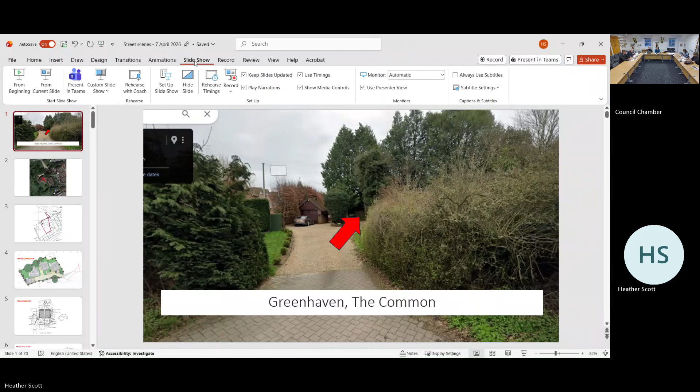Okay, we've rounded up a bit. This application is a resubmission following the refusal of an application for the demolition of the existing and replacement with 3 detached properties. This application now seeks replacement with just 2 properties.

Currently on the site is a dated dormer bungalow which covers a good sized footprint, with the plot's land totalling around 0.15 hectares. It's proposed to demolish this property and develop the plot with 2 detached properties. The area is characterised by properties that are set back from the road with natural screening and grassed areas in front. Properties are well spaced with ample amenity space around.

This application looks to address the previous reasons for refusal by reduction in the number of dwellings, revised siting and a reduction in height, which would ensure a more spacious form of development compatible with its surroundings. The siting and orientation of the dwellings, together with their relatively modest ridge heights, would ensure that the development does not result in an unacceptable loss of light or privacy and does not cause overbearing impact to the neighbouring properties.

The proposal would deliver a safe means of access with provisions made for refuse collection and fire safety. As part of the application, the applicant will enter into an agreement ensuring appropriate mitigation against any adverse impacts on the Chilterns Beechwoods Special Area of Conservation.

The proposal would not result in the loss of trees or landscaping features. New planting would be provided. The ridge height of the proposed dwellings is around 8 metres, which is a reduction from the 11.5 metres in the refused application. The existing property height is around 8.3 metres at the highest point.

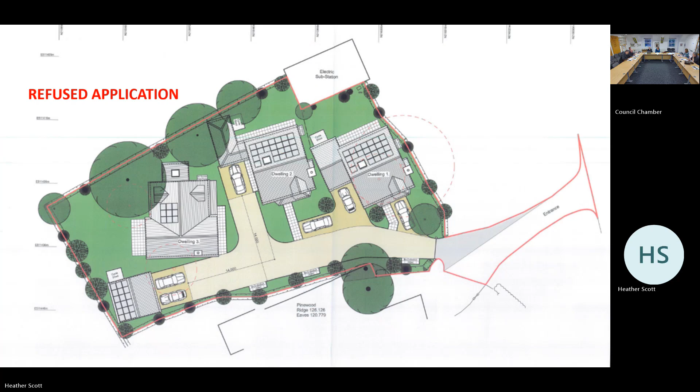So is your point in respect of the bins, the increase in bins, the traffic, and the objection that's been made? And it's just those posts put in that lay-by - stop people pulling up there.

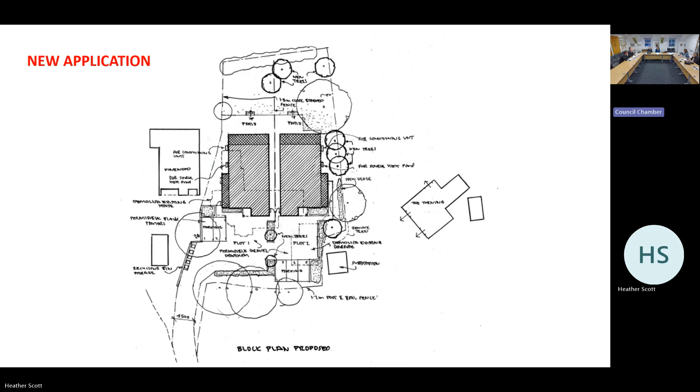I'm not sure there's a lay-by, more like a verge where people get parking. Oh right, I think what they're referring to is actually parking in our car park just on the end. So they park in the car park, and because there is no footpath, they walk along the verge to get to their driveway on the left, and then cross over, because they're coming up from that car park on the corner.

Alistair? There's not really a reason, is there, ultimately - so it's sort of valid, but unfortunately for the parties concerned, it's not a reason to not allow it. They've addressed all the issues - the heights, the number of properties. So I have sympathy, but I think as well, you could have one house with someone who's got maybe 11 or 12 cars.

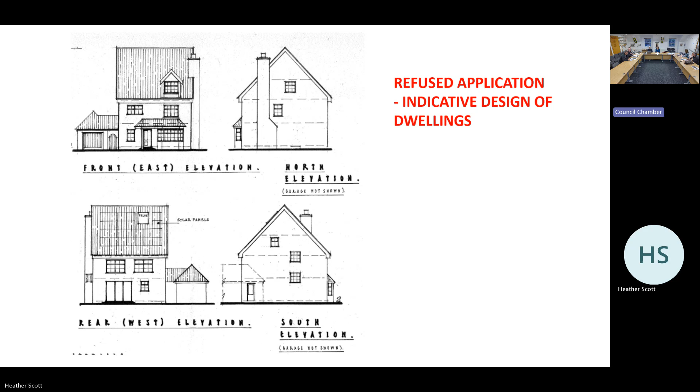Or you could have 2 houses where they've only got 2 cars each, so it doesn't necessarily dictate anything. There's no concerns expressed from the refuse collection department at St Albans, and they are one of the consultees, so.

Is everyone happy with what Heather suggested, which is no objection subject to the previous reasons for refusal request? Also, you think of bin collections on terraced houses, on pavements - it's chaos.

So we're happy with it - it's not ideal, it's not brilliant, but as Alistair said, I have got some sympathy. It's not absolutely - I suspect what will have to happen is there will just be some trimming back of that hedge, bush, just to make a bit of room for people driving onto the ground to get to the driveway.

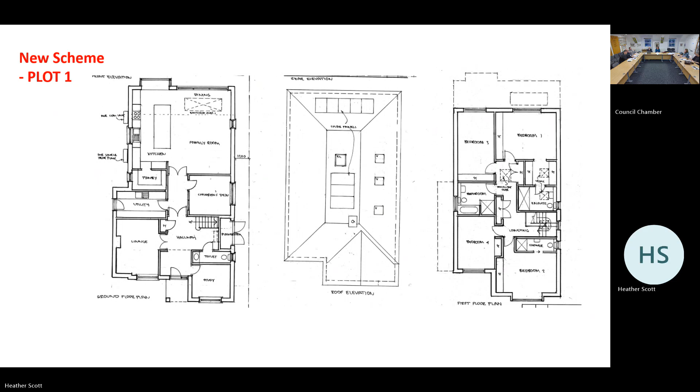That's great, okay, so we're all fine with that one. So now we're going to 5/2026/0339, which is 15 Rothamsted Avenue.

Thank you, Heather. This property has had a number of applications with similar intentions approved in recent years, but have not been constructed. The last application, approved in 2022, was similarly described, with the main changes being: this application does not include the provision of a basement comprising underground parking, a gym and a cinema room. The ground floor rear extension projects further rearwards, there's a modest 300mm increase in ridge height to accommodate the proposed loft works, and a detached double garage is now proposed at the front. Fundamentally, the changes are relatively modest and in some cases less than what permission has already been granted for.

The property is locally listed in the Harpenden Conservation Area. However, the design and choice of materials are in keeping with the host dwelling and surrounding area. I'd suggest no objections, subject to compliance with policy 85 of the district plan and policy ESD2 of the neighbourhood plan.

Everyone happy with that? Yep, thank you, all good.

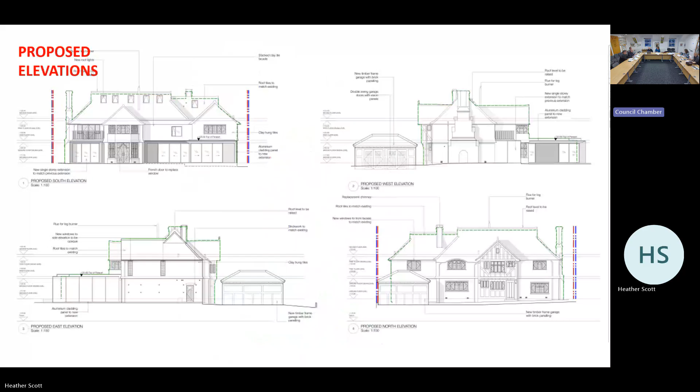5/2026/0051 will not be discussed this evening.

Proposal is looking to add a two-storey side extension which marginally protrudes further than the existing front and rear building lines, and convert the existing single detached garage, located at the end of the garden, into a games room. Ground floor, the extensions will provide open plan living accommodation and a playroom. The first floor extension will provide 2 bedrooms along with the conversion of an existing bedroom into a bathroom. Therefore, the increase is just 1, to total 4 bedrooms.

Other properties in the street appear to have made alterations to their properties in various ways. Due to the position in the street scene and the location of other properties, the proposed extensions will not cause any impact on the neighbouring properties. The front garden is to be repurposed to provide 2 off-street parking spaces. Part of the proposal is new fencing around the perimeter, taking in the existing garage and driveway space into the garden. Not a conservation area, and no tree works are proposed.

Consider no objection. Just out of interest, as a highways point, I thought you had a problem with doing drop curbs like that. They're extending the drop kerb. Yeah, I think they have an issue if you're wanting to extend the kerb or add an additional one, but I don't think they're making any changes. Is it going into the front of the house, or the back?

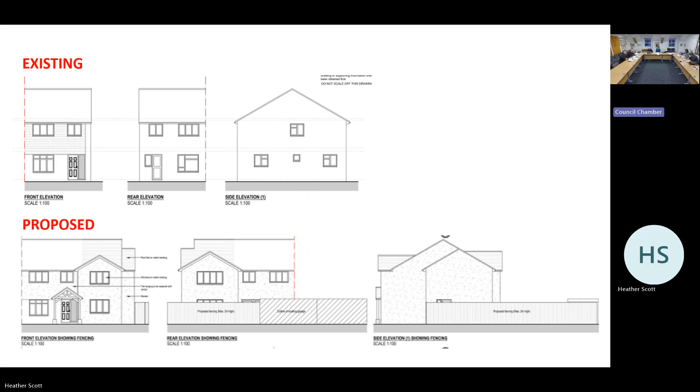There is obviously a brick wall of some sort, maybe that's at the end of the garden then. Yes, that's the back of the garden, behind the hedge, I assume it must be the brick wall there, where the black line is. I think that must be the brick wall, then there must be just like probably a closed board fence. What they are doing is, you've got a brick wall at the front, and then they're including the back of the garden and garage into their brick wall.

So they're extending their garden over their driveway and putting the driveway around the front, which is hence the need for a drop kerb. It just says proposal around fencing around the perimeter, taking in the existing garage and driveway space into the garden. It could go all the way around, we don't know. But that might be what that little triangle is, that they're trying to keep that area clear for visibility.

Okay, is everyone happy with Heather's recommendation of no objection? Yeah. Yes, thank you.

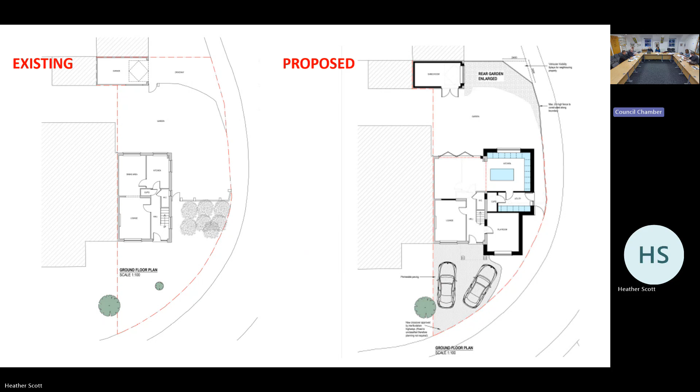5/2026/0388 is not going to be discussed this evening, and 5/2026/0217, which is 8 West Way.

This property is a relatively modest sized dormer bungalow sat between two-storey houses, both of which are much more dominant. Proposal is looking to extend the property to become a two-storey property with accommodation in the roof, to a similar scale as the neighbouring properties. The ridge height is increasing from approximately 5.8 to 8.3 metres high.

The footprint is not increasing. In fact, a section to the rear is to be removed, thus creating a clear gap down the boundary with the neighbouring property. There is no street scene provided to understand the relationship of the extended property with the neighbouring properties, but the property appears to be of a similar scale and design as the neighbouring properties.

Not conservation area and no tree works. Consider no objections, subject to no adverse effect on the neighbouring properties. Policy ESG2 of the neighbourhood plan and 72 of the district plan apply. Have you got any problems with that? No, okay, that's good, thank you.

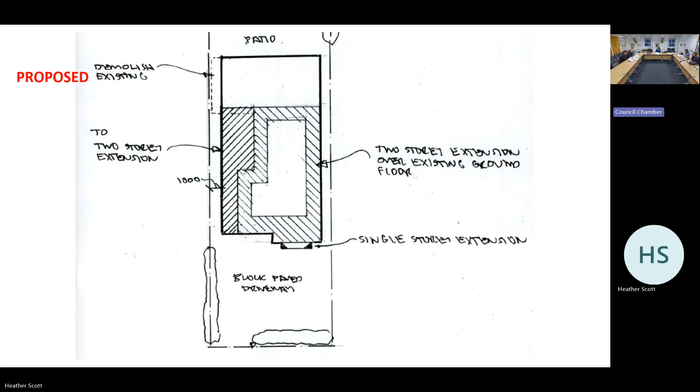5/2026/0351 is 6 Church Green. The property is located next to Waitrose Supermarket car park on one side and number 7 Church Green, which is sat on a much further forward building line on the other side.

The proposal is looking to extend mostly to the rear, which is not visible from the frontage, with elements of side extension which are obscured by the existing house and with good screening to 3 sides. At ground floor, it is proposed to extend along the side from the existing utility room almost to the boundary and extending 5.5 metres further than the existing rear building line on the Waitrose car park side.

The extension is stepped in from the existing side boundary on the side towards number 7 Church Green. The first floor extension does not extend as far rearwards as the ground floor extension, with a 1 metre recessed central section with a green roof on the remaining ground floor projection.

The ground floor changes will enable the property to be reconfigured internally to suit more modern day living. The first floor extensions will provide 1 additional bedroom along with dressing rooms and en suites. Garage is retained and there appears to be at least 2 off-street parking spaces available on the frontage.

Property is locally listed in the Harpenden Conservation Area. No trees or hedges are affected by the proposals. And I've said consider no objections, subject to the proposals being deemed to be acceptable on this locally listed property in the Harpenden Conservation Area. Policy is ESD2 of the neighbourhood plan and policy 69, 72, 85 and 87 of the district plan apply.

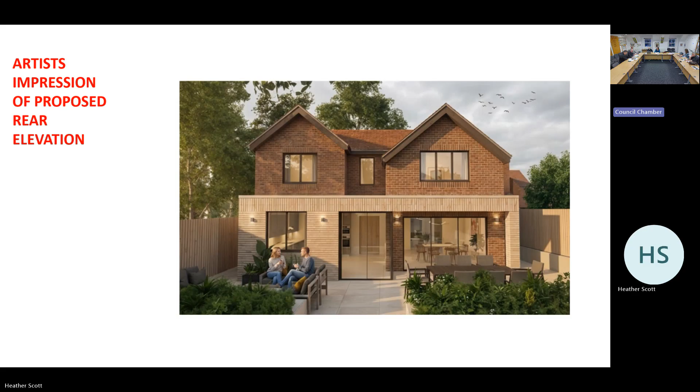There isn't any problem with the conservation area here, is there? Because it's quite a fundamental change in design. Oh, just the back. It is just the back. Yeah, I think generally they get a bit sort of funny if the materials and appearance are out of keeping, very different, but generally it's about the appearance in the street scene.

So I think the fact there's no changes at the front, that is one of the main reasons why they probably haven't made any changes at the front, is to retain that character and style. So the fir trees here is Waitrose car park, and then at the back of it is a block of flats that's also blocked by large trees, so it's only...

Yeah, but it's not very visible actually. Church farm, if Waitrose car park gets turned into housing at some point, isn't it, in the local plan? It is.

Right, I agree, it doesn't look very much. Are you happy with that then, John? Yeah, I just asked the question being the conservation area really, but from what I can think of around there, it won't be very visible at all. No, not definitely not at the back, no. Yeah, it won't be. Okay, so thank you very much.

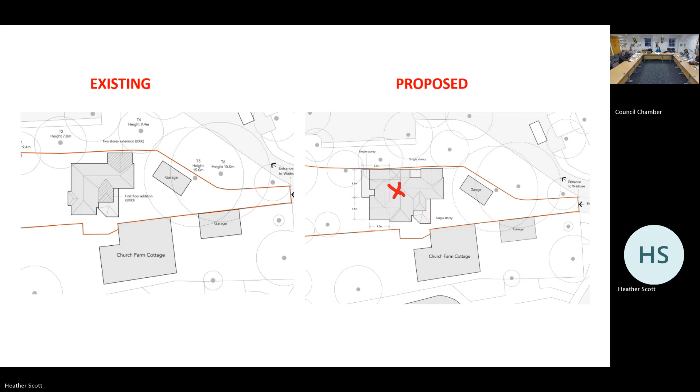We're all happy with that one. So now we're going to move on to 5/2026/0373, which is 23 Kirkdale Road.

This application is a resubmission following refusal of a 2025 application for a larger scheme. Property sits at the end of Kirkdale Road on a corner plot that opens out to the side and rear, and does not sit as part of the main street scene of the road. Public footpath runs along the rear boundaries, number 6 Salisbury Road also to the rear.

The current property at ground floor level is made up of lots of individual rooms, and this proposal looks to extend various elements to create a more uniform footprint into the available space surrounding and to the side. The main changes from the refused scheme being the first floor side extension has been deleted, removing a significant part of the additional bulk that was associated with the refused scheme. Rear extension has been reduced in height and would not now exceed the main part of the existing ridge.

The extensive single-storey rear extension has also been removed completely from the scheme, and instead a replacement outbuilding is to be constructed on the existing footprint and at the same height. The garage is lost, but 3 car parking spaces are available on the frontage.

Due to the orientation of the plot and the positioning of nearby properties, there appears to be little, if any, detrimental impact on the neighbouring properties or on streets. An arboricultural assessment has now been provided, which details the removal of 2 trees and 1 small group.

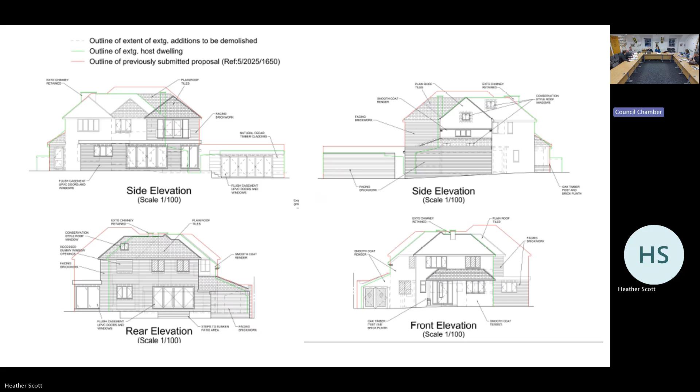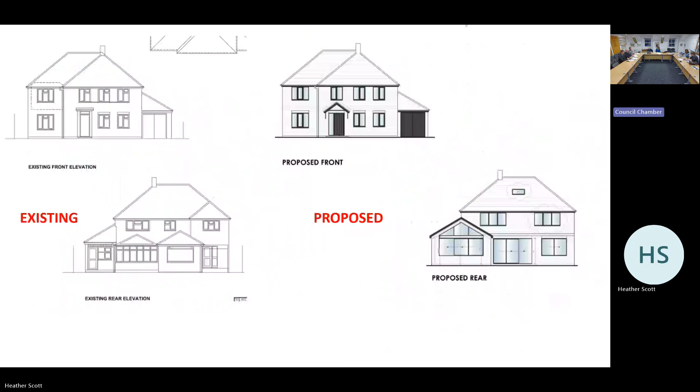5/2026 0742 does not meet the criteria, so now we move on to 5/2025 1717, which is some land off Balk Close.

This is the 3rd application that has been submitted on the site since 2021. Both previous applications were for outline permission with all matters reserved with no detail on the proposed development. The first was dismissed on appeal for being inappropriate development in the Greenbelt, causing substantial harm to the openness and significant harm to the character and appearance of the area, with no special circumstances demonstrated for approval to be granted. The second application was withdrawn before determination.

This application is for full planning permission with all associated supporting documentation. The application is for 9 3-bedroom dwellings made up of 1 bungalow, 2 detached and 3 pairs of semi-detached dwellings. The mix of houses proposed are of a size that are in need in the town, especially the bungalow that is included.

Access to the site is via the existing Balk Close access road. There are 2 parking spaces per property with 4 spaces for visitors, which meets planning policy.

The site lies in the Metropolitan Greenbelt, but the applicant is of the view that the site should be considered as grey belt under the changes to the National Planning Policy Framework in December 2024. The site is also detailed as a potential site for development in the emerging St Albans City and District Local Plan, which is currently under review.

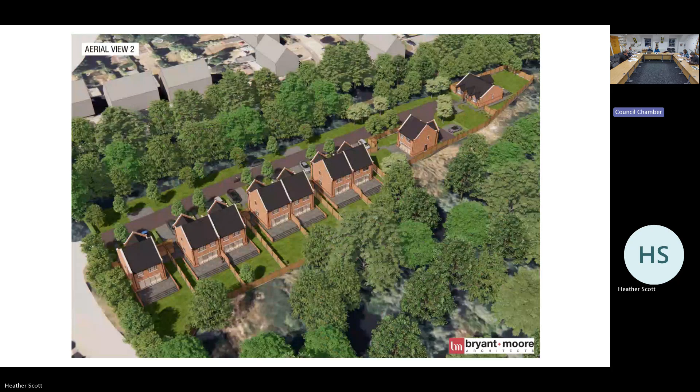In a sense, my viewpoint is based very much upon the changes that have now come in with this grey belt, and the fact that this site is very clearly stated in the emerging local plan.

And in terms of what was refused before, was it a similar number of properties? It didn't give detail, it was literally a bit of a scoping opinion. I think the description was outline application, with all matters reserved, for residential development of vacant land to provide affordable dwellings. The other one was pretty much exactly the same, but there was no details as to what they were going to look like, the quantity of them or anything.

Where is this? If you go down Westfield Road, you've got the Red Cow Pub, you've got Balk Close on the left, and it's literally when you drive down there, it then sort of goes round on itself, a fairly new shape. Balk Close is fairly new in itself. I have a house down there for my parents, actually. I know where it is now. As you continue along down the road, it goes in and then it goes left into Cold Harbour Lane. That's at the end. Yeah, I'm with you.

I'm very sceptical about the assessment of the flooding. Were you going to say that? I agree with that, definitely. That's as high as I'm going to put it, because I don't have anything in front of me that would suggest otherwise, but I would suspect that quite easily you would get anecdotal evidence from the allotment holders and dwellers around there that flooding is frequent, an issue and something that they are very alive to. So saying that flooding isn't an issue and just leaving it at that, I think is a problem, and even the works to build all this might even cause more flooding.

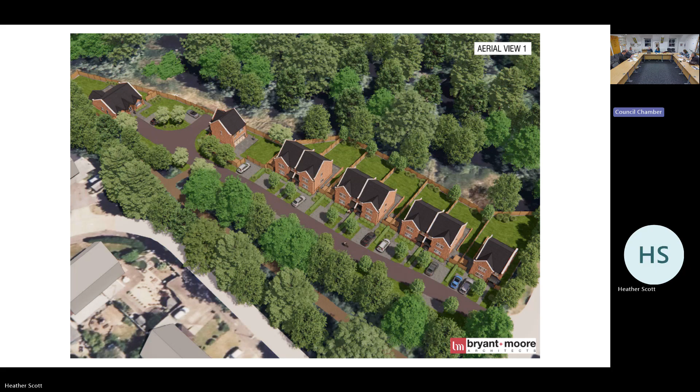Doesn't sound very forward-thinking. I'm being a bit cynical here, but looking at those back gardens in the picture, it's almost as if they're anticipating a level of water. You'll see there's a patio and steps back down into the garden on each one - they're built up. I'm being a bit cynical, but it's an interesting part of the design that you don't see often, and you do wonder if there's a bit of anticipation there.

So I'd share Beth's view that I'd be very sceptical about the apparent low risk of flooding. I'd be very surprised about that, but I don't have the technical expertise to gainsay it now. I'm also concerned that with this development of the green belt, there's loss of trees and greenery for which there doesn't appear to be any plan already in place. I know it's part of the conditions, but I really think something like that should be part of the application, particularly in circumstances where it is eating into the green belt.

I was confused about this biodiversity net gain business - at least 5.1 off-site units must be acquired. Does that mean they have to plant trees somewhere else? Correct, it doesn't have to be somewhere else, it can be within the plan area. It can be, but generally if they do it within the plan area it normally forms part of the planning application. It's normally a case of if they don't, it's because they don't have anywhere to offset that amount.

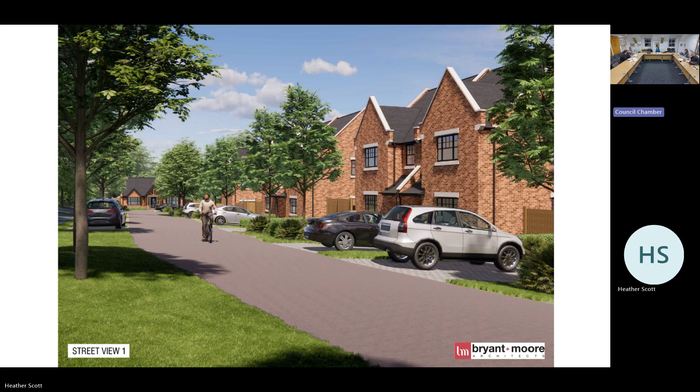Problem is if you try and suggest that, okay, well, you stick 2 maisonettes in place of 1 house, then the cost for that little lane is gonna be way too much. I still think in the realms of what you can do in Harpenden, they're family homes, they've got reasonable gardens.

It is grey, not green. Maybe greenish grey, sage. It's still not prime green land, I wouldn't have thought, from the view piece.

If you're gonna have to have development, and the government says we're gonna have to have development, it doesn't seem like a bad piece to me. And I think personally, if I was looking at it, I'd prefer lots of things of 9 houses slotting in here, there and everywhere, rather than building 200 houses, which comes with all of the shake-up that goes with that. So personally, I wouldn't say I'm thrilled.

So based on that, Alistair, that was the second of the 2 options that I proposed. What are the caveats you'd want to put on there? I think at the moment the biodiversity one is a big one, but that's covered, it's to come. So I think I would be happy.

I agree with the flooding piece, but there's a little bit of me that goes, that's fine, beware if they've got consultants to sign off, and sure that consultant knows what they're doing. I'm not sure I would be feeling as personally comfortable. But it's the knock-on effects for other people. The people that buy those houses, caveat emptor, they'll have to have insurance, or they'll have an agreement with the people building the properties, and that will be as it may.

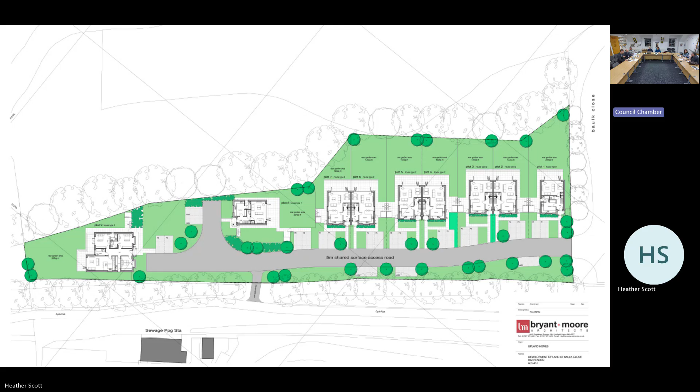So 5/2026, 0451, 0443, 0423, 0434, and 0442, 0467, 0444.

Do not meet the criteria for this evening.

Our final one is 5/2026, 0433, 12 Hartwell Gardens. The proposal is looking to extend to two-storey level over the existing garage roof to provide another bedroom and ensuite, and to reconfigure the existing bathroom. Also proposed is a single-storey extension to the rear side to expand the lounge. The property sits on a relatively spacious plot with good screening. The road layout does not follow a usual format, with properties sitting on uniquely positioned plots. The road appears to slope upwards towards number 14, with no overlooking windows to be affected by the proposed first floor extension. There also appear to be a number of other properties in the street which have been extended over the garages. There is ample parking provision with a double garage and 2 off-street parking spaces. No tree works, not a conservation area, no objection.

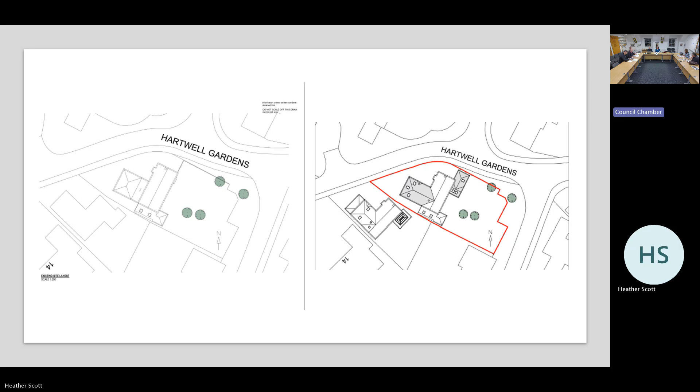Run with that? Yeah, lovely, thank you. Good properties.

Any appeal decisions? There's a couple, one for 8 Hawthorne Close. We didn't actually provide a comment on this one, but the appeal was dismissed, so they've obviously agreed with the district council's reasons for refusal.

The next one, 15 Swansea Avenue. We actually had no objections, subject to no loss of amenity to neighbouring properties etc. The district refused it due to insufficient information to prove there was no loss of light to the neighbours, and the appeal was allowed. So we're in line with them.

The other 2 are just notifications, 2 applications have gone to appeal, so we'll wait for their decisions. Interestingly, one of them is 39 Topstreet Way, an application which we keep getting back all the time - the one next to the allotment access. So we'll wait.

Is there a builders actually called Nobody Builders? I believe that they are. Oh okay, fine, yeah I know. I'm glad to agree with you, but yes. That's how I know, isn't it.

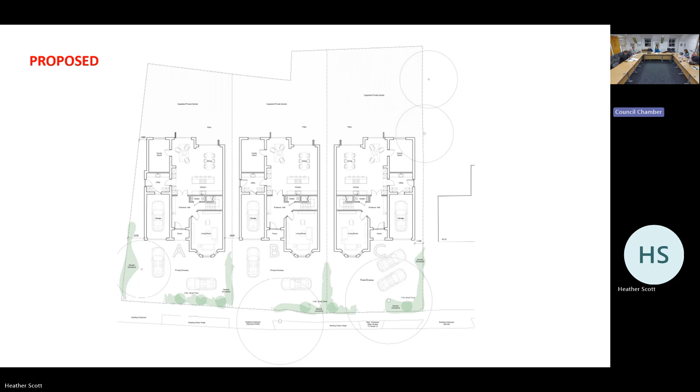Just to update the committee on decisions, for number 54 and 56 Roundwood Park, to demolish the 2 existing properties and replace with 3, that was granted permission.

An interesting one to keep you in the loop with is number 6 High Street, the old M&Co building. We had a couple of applications - a prior approval went in for the change of use for the 1st and 2nd floor to become flats, including getting a balcony out the back. The ground floor was left as a retail unit, and the 1st and 2nd floor to become 4 one-bedroom flats. The prior approval has been refused because it needs to get full planning permission, so we'll wait and see when that comes forward, but just thought I'd give you a bit of an update.

So potential, it would be a shop or whatever downstairs but flats upstairs. Correct, yeah. Probably sensible really, because I think it's clearly been demonstrated - quite an interesting size retail unit if you can't do a lot with it. It's clearly been shown that to be financially viable it needs that additional space on the 2nd floor, which they're just not going to get permission for. It's quite an old building anyway, to be honest.